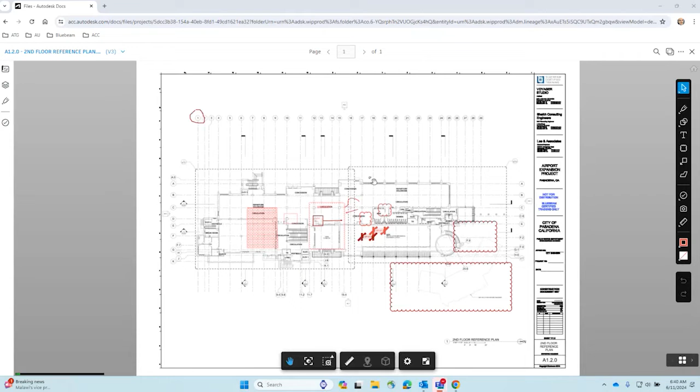Now, these are the ACC markups, and just so we're all aware, ACC markups are rasterized markups. So truly, it's a layer on top of the PDF, rasterizing the PDF itself. It is not an actual markup that is being vectored based on the PDF. So when you bring this out or look at this through Revu, you don't see the ACC markups, but you do see the markups if you mark up through Bluebeam into Docs, because they aren't rasterized.

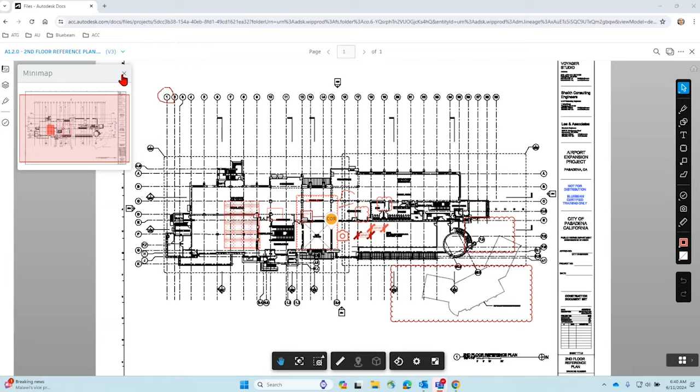I think if you do have questions, you can ask - just a recap if I didn't clarify that. Just to recap, if you haven't seen the difference between raster and vector, it's a big difference. Raster is going to be anything old and scanned, so when you zoom in, it's all pixelated and gross.

Vector is driven from something generated by a computer, right? So it came out of CAD or Excel, things like that, where you zoom in and get that crisp line. That makes a difference. So when you bring a PDF that was vector-based

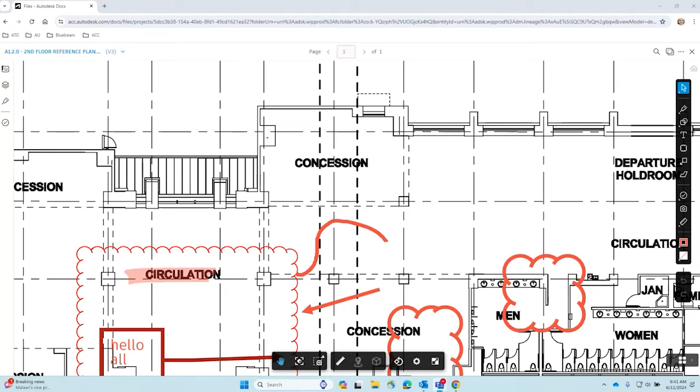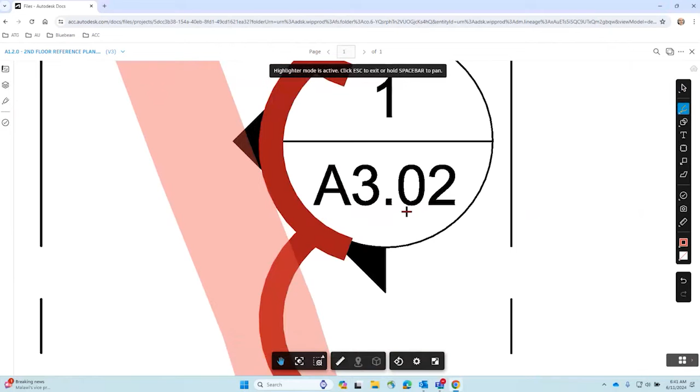and bring it into ACC and start marking it up, it then rasterizes it, which makes it a little gross. So with that, what can we mark up in here? You can select, you can multi-select. I'm assuming this just lets you select your markups. You have the ability to use a highlighter. Oh, I forget that the zoom's different. So you can't really select the text.

I would assume that's because it's rasterizing it to be in the cloud. You can use a pen. Let's scroll out. What do we have for markups? You have a cross that you can change. You have the ability to use the circle. I'm not going to go through all these, but there you go.

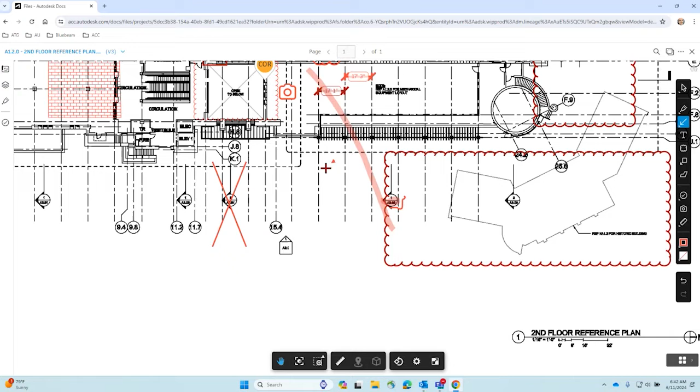Can you edit this circle though? Yeah, let's see. But you can't change your arrow. Okay, no, so there's that. You have text.

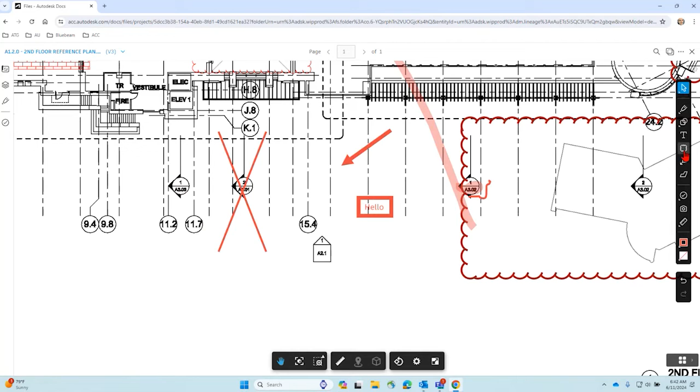Now, the one benefit to this would be if you're already in a solution and sticking true to a single solution because it's a single source of truth, right? That would be one plus, meaning the design team's already in Autodesk Construction Cloud and they're publishing into docs, sets, and vice versa into build.

So if I go into cloud here, can I go through and mark up on it with a Rev Cloud? You can. You have a call out. Perfect. Same thing, just not a lot of modification to information here.

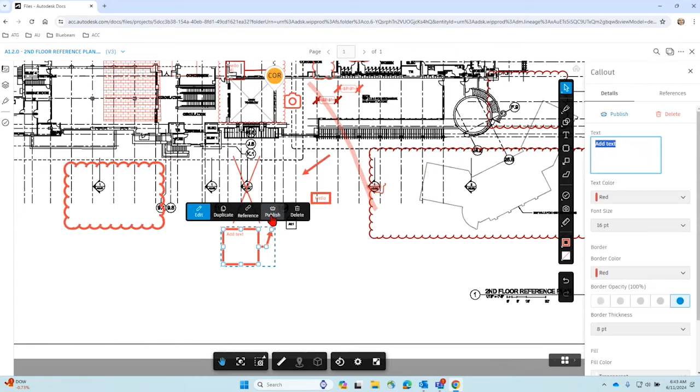You can also wait, just so we're all aware, within docs there is a publish feature. So if you wanted to wait to send it out for everyone to have access to it, you can wait to publish them or unpublish them so people can't see them. The difference is that if you're marking up and you don't publish it, that's only available for you to view. So only when you open it do you see those things. When you publish it, if anybody else opens it, then they see them.

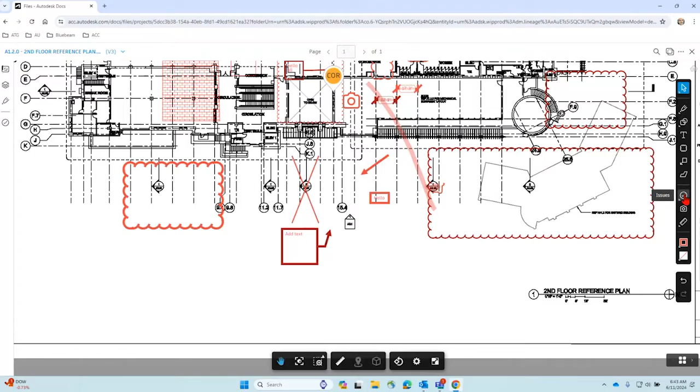I really think, I don't know, because it's been a while since I've been in the field, I probably wouldn't use markups. I'd probably use issue tracking and live model issue tracking, right, versus marking up in this way. That's probably the route I would go in industry versus marking up here.

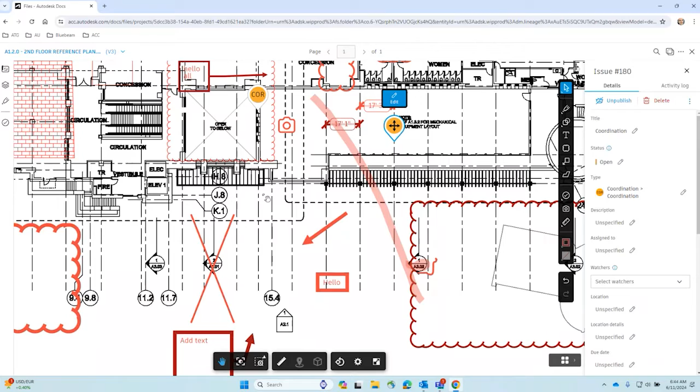But that's just my opinion. So there are issues from a PDF perspective, but I would prefer to do issue tracking from not a 2D standpoint. If we're using Autodesk Construction Cloud, I would rather leverage a 3D model than a 2D PDF, right? Because it's right there at our fingertips for coordination purposes, marking up something that's not modeled correctly. Or for this instance, if I said this door is out here in the middle of nowhere, I would have seen this in the model versus the PDF, right?

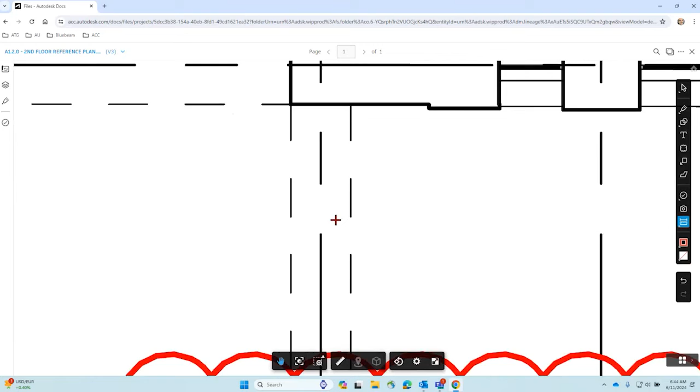And then done issues. But yeah, we're doing this just for the sake of showing, right? So you can add a reference photo, you can measure, but you can't snap. So it's a pretty rough eyeball estimate. Again, I would believe that's probably because it's rasterizing it via the web browser.

You do have area, cool. So you have area, freeform, polygon, freeform line, polyline, and calibrate document.

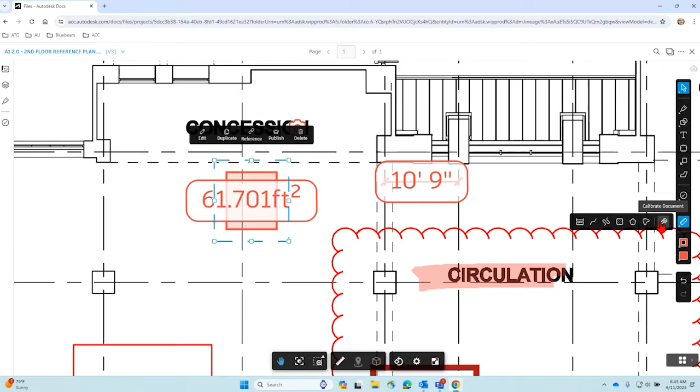Did you already calibrate this document? How does it know what scale? No, that's what I was wondering. Let's just go to a typical doorway. Let's see, there is a scale bar on this drawing. Oh, good call. I forgot this is the out of the box one.

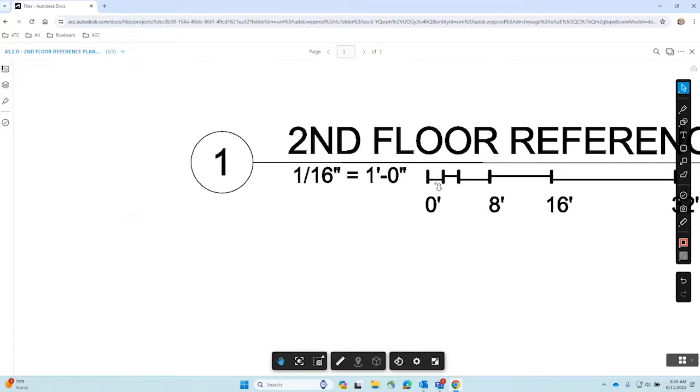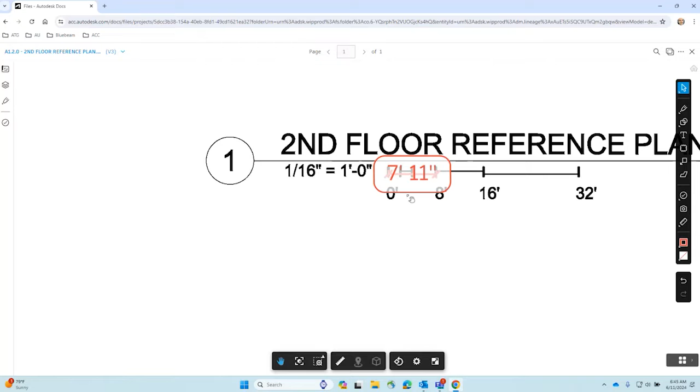Yeah, but you still can't snap to it, right? So your calibration is going to be off. I don't know about you, but an inch is an inch. That's not tight enough for my liking. I wonder if you'd have to go to, since I can't see the line weights end to end... oh, I guess end to middle.

Yeah, but then how do you know the difference, like wherever else you're measuring? I don't know, so right.

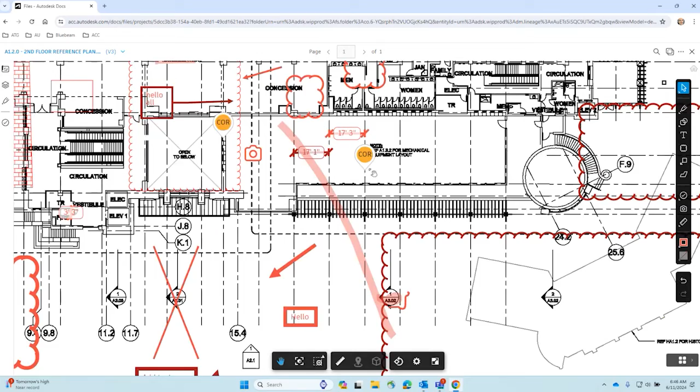Very rough. I mean, obviously Autodesk does have a better takeoff program, aptly named Takeoff, but that's meant for more 3D workflows and model-based workflows like Michael was talking about.

But there are some pros for this 2D workflow. One of them is, I was getting excited and then had to temper myself, because in AutoCAD - not Civil 3D, not AutoCAD Architecture, plain old vanilla AutoCAD - eventually these markups you make in ACC are going to be able to come over to AutoCAD and be visible.

So that's where, hey, I'm away from my office but I need to go see those new plans Bobby put up for me to review. I can make markups on my phone, iPad, Surface, or whatever web browser, go in, and then Bobby can open up AutoCAD and say, hey look, I've got changes I need to make. It'll allow that coordination, which will be pretty slick once it gets sorted out.

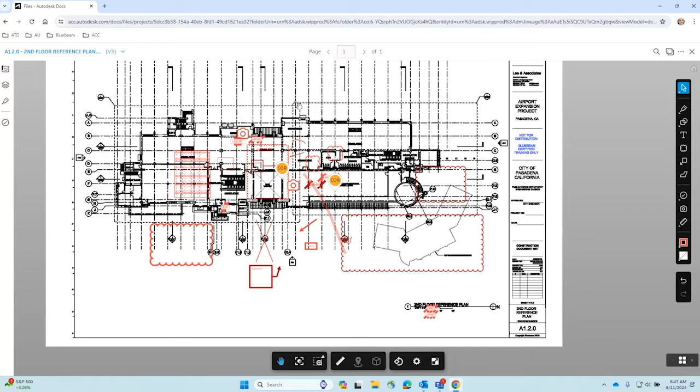But nobody's using plain AutoCAD as much anymore.

And I was going to say, if you come back to it, I can just come into here instead of going through the model itself of a 2D plan.

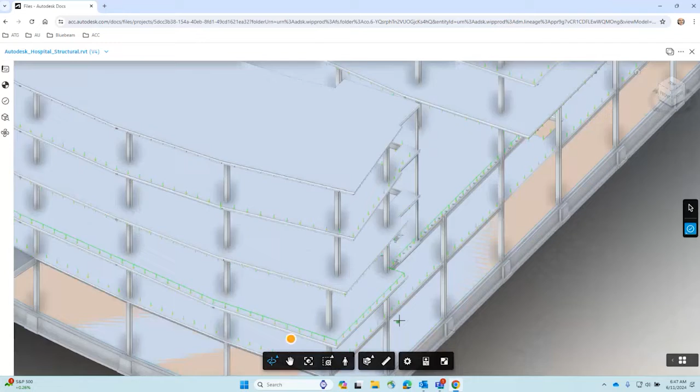This is something we're not comparing because it's completely different, but issue tracking directly in here - hey, there's a coordination or model issue within this specific area, and you're assigning it to a person. You can already do this from a Revit standpoint, issue tracking directly inside Revit to address those issues.

So it comes down to, well, we're comparing 2D, and that's what Jason was saying - at some point I think that'll be cool for those folks modeling in AutoCAD who are still in that era. Drafting in AutoCAD, there's no modeling in AutoCAD.

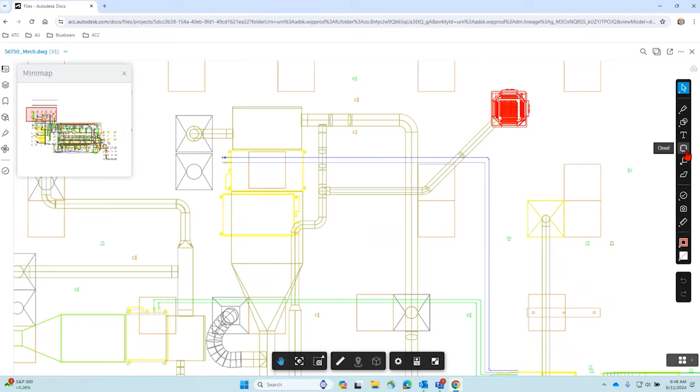You can do something like this. That doesn't even scale right. Can I scale this down? No, that's terrible.

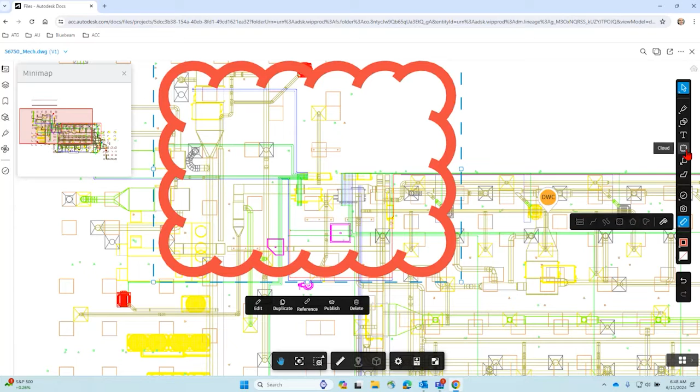What do you do in this instance? I guess you rescale the PDF. Does that change the size of this? No, I can't even rescale it because it's a DWG. So they just have a big rev cloud for an area. That's kind of gross, that's what I'm saying.

It's weird. There was a comment from David - if you can't mark up accurately, so our scales are off, calibration's off a little bit, how would it bring into AutoCAD accurately?

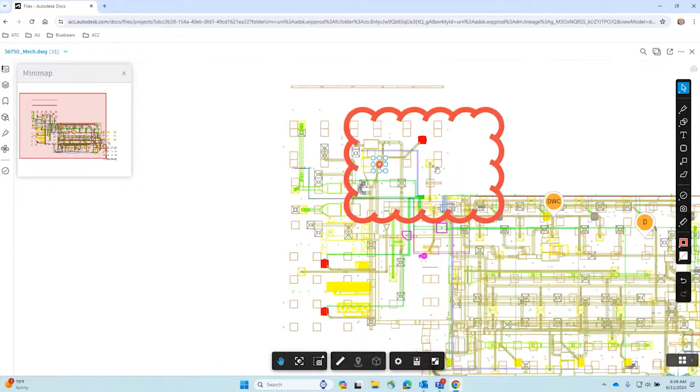And it wouldn't, but that's not what you're going to be using this for. You're going to be using it for callouts - hey, move this door, hey, this is spelled wrong, we're missing a table, that type of thing. It's not going to be an actual design thing where you draw in a new wall or structure or location of something and have that come over geographically. It's just going to be more of a typical markup workflow.

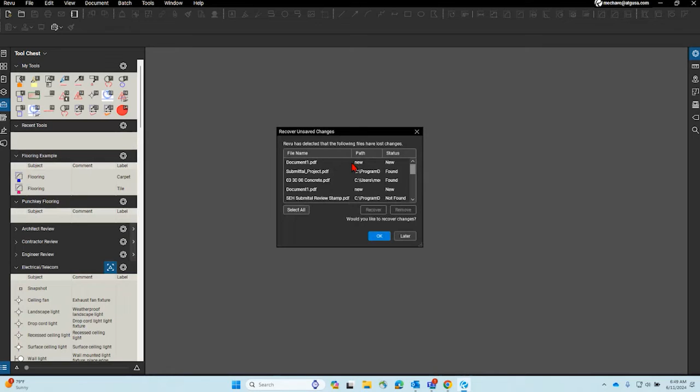But let's open Revu. So outside of those markups - okay, your team doesn't want to use ACC markups because of the limitations of what's available - what options do you have? We're not going to pick, we're just going to inform and allow you to make the informed decision.

There is a workflow - you can go to File Open. The only downside to this is that one person can have it open at a time. The one plus side of ACC is you can mark up simultaneously on a PDF, which is a rasterized image. So really you're not marking up a PDF simultaneously like in Revu, it's an image simultaneously in ACC. So the downside, if you open it up in Revu, is another person can't have that same PDF open.

So if I were to go here, I can go to Docs. Everyone has access to the desktop connector, whether you've installed it or not is up to you. From here you can go into your projects, and from this point you can access - I forgot where I have PDF right here - okay, you can access any PDFs you have in Autodesk Construction Cloud.

Now for those folks that haven't used the desktop connector, the new one, just so you're aware, you do have access to decide what projects you want to have access to through your files here.

Just be aware that you are selective on what docs from the Desktop Connector show up in your file explorer. Reason being, some of us have hundreds of projects and don't want to see all of them. I think you're only able to select around 40 of them.

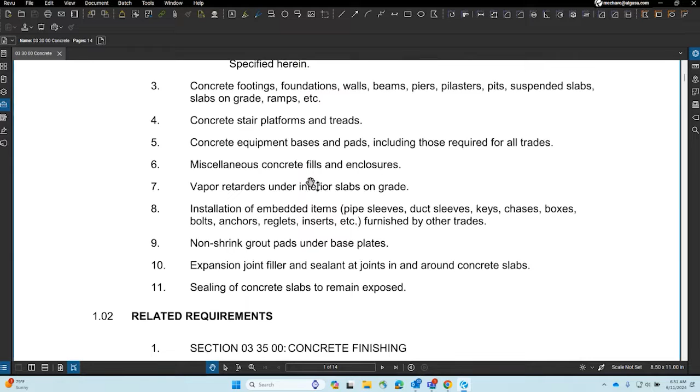So what you can do is I can open this up, and I can mark up PDFs. What I'm able to come in here to do is mark up. Let me actually just go through this from the ACC project.

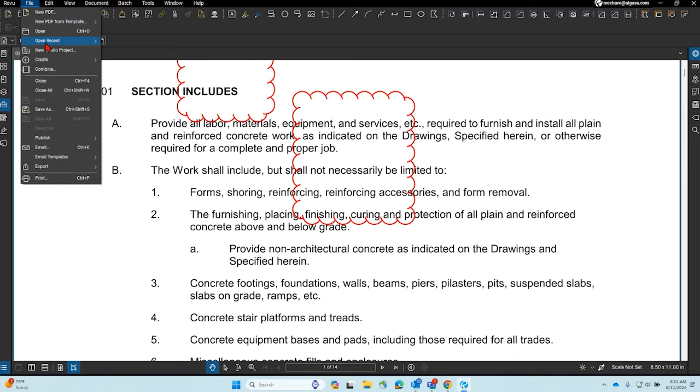I don't believe I have that one open. Let's go back and see. Did I have the Kyle Lee's one? I did, okay, Sandbox, yeah. So in typical Michael fashion...

He hasn't updated. So according to Caitlin and some of the other folks in the chat, with the new update to Desktop Connector, you can get 80 projects instead of 40, which again is just too much. It's too much, but hey, you can do it. And there's issues with working in it.

I think the issues with Desktop Connector are version specific. So if my update was from 15 to 16, I'd have an issue, right? Yeah, there's 80 projects right here. But my update version is like the points, I think, 16.8. Oh, I'm probably way behind myself, but that's okay.

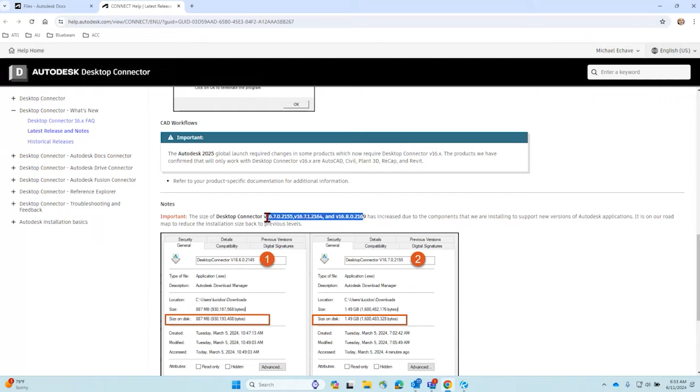Yeah, I know, because there was an issue with going from the 15 to 16 transition and working in a project in ACC. So you have to be diligent on updating, especially when it's a brand new version. I just haven't been working on projects. Typically when I go work on a project in ACC, I make sure I update to the latest version.

And keep that in mind for the IT folks on the call. Desktop Connector does require a bit more updating, and if you don't allow your users to have local admin, that's something you're going to want to make sure is taken care of, and everybody's on the same version.

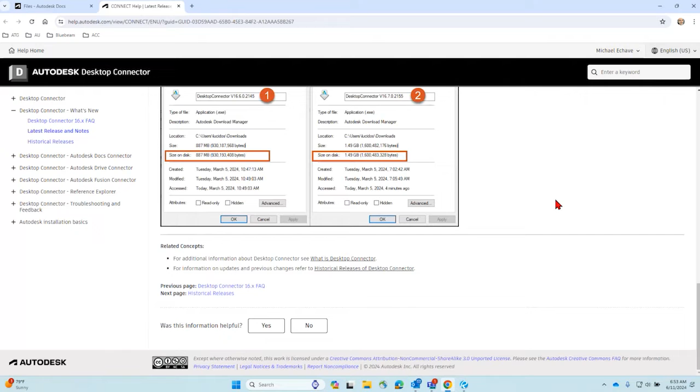Yeah, look, they did a 0.0010 update, but being aware is hyper diligent for working in ACC, especially when updating. This needs to be up to date. And that depends on linking methods.

You should be using an external reference. You shouldn't be using link through Desktop Connector. So I guess that's just more about being aware of how you're leveraging ACC. Whenever you link a file, go to external references. You do not go to docs. Just so we're all aware with the ACC platform part.

Now, you do have to use the Desktop Connector when bridge is happening, but I'm not going to get into training right now, I'll continue onward. Going back into here, because I can feel Jason just staring at me, laser beams.

So going back into here, you have the same PDF that's in ACC that we were just looking at, and we saw a bunch of markups that were on there. So I'm going to hit open. And these are the markups from Bluebeam.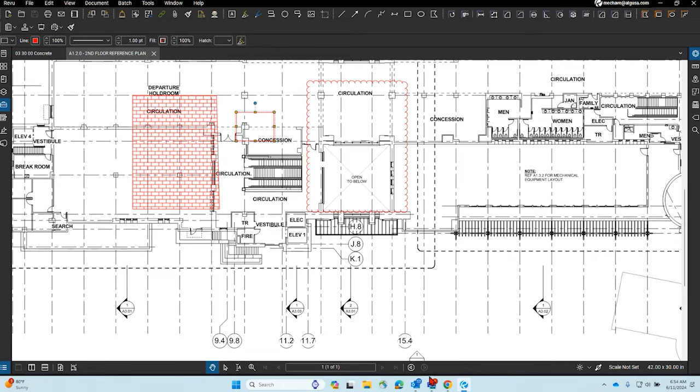But if I go back to that same PDF, I don't see the markups from ACC, right? I do see the markups from Bluebeam, but not the markups that ACC made. So be aware of that.

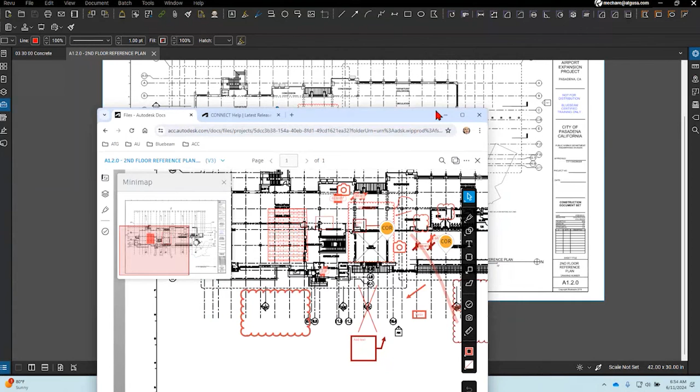And now I can see that I can be in it. I can still mark up, but I still have this open. If I go to docs, I will say that it does lock it. So let me open up a new window explorer here, trying to do 10 things at once.

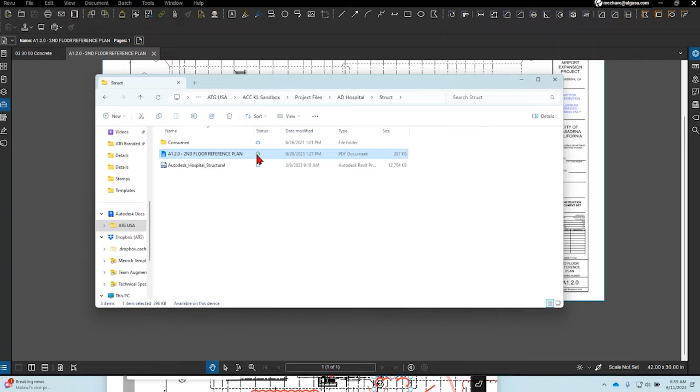But basically, if I go into here, I go back into Kyle's project, I go back into here, I see that this one is open right now by me. Well, it doesn't say by me, but it shows a green checkbox. I can come into here and do this, and it will show a lock.

I did this the other day. Basically, when I come into here and I hit save, let's see if I right click on this, it's going to definitely...

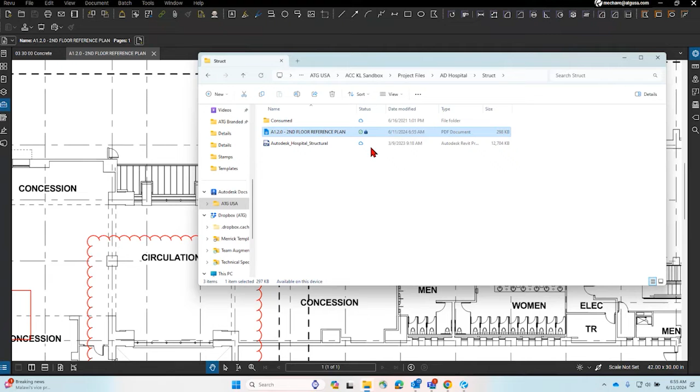So if I hit save, I go back into here. It's locking it because it's syncing a pending request, a lock from ACC in terms of file locking so it can publish a new version. Great, so it unlocked it.

I probably could have seen, like, in the same time of me saving it, is it doing something? Well, yeah, see, it just turns blue. I would assume that means there's a new version being published here into the ACC platform.

And that's one cool thing this offers - version history. You can always go back and say version one, version two, compare them, or re-enable version one to make it current. It also becomes really handy for tracking progress, either in the base files and arrangement, and also the progress of the markups as they're being taken care of.

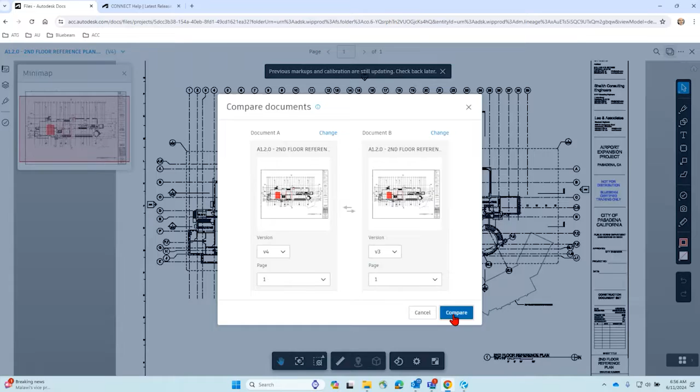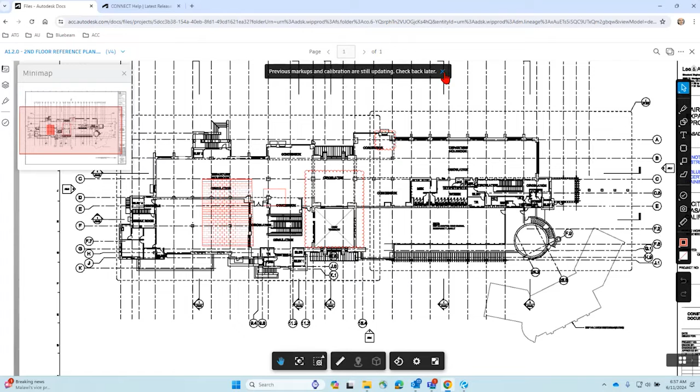So I'll note that the Revu markups are still here, but the new version erased the ACC markups. Oh yeah, it now says previous ACC markups and calibration are still updating, check back later. That scared me. So how long does that take? I don't know.

Because it's essentially like a layer on top of the PDF, an image of the ACC markups - that's why you don't see them in Bluebeam.

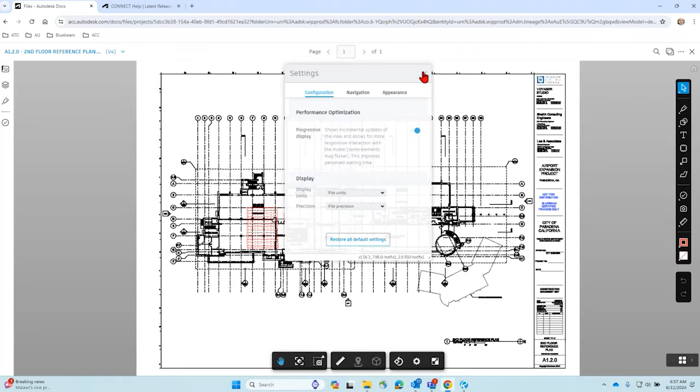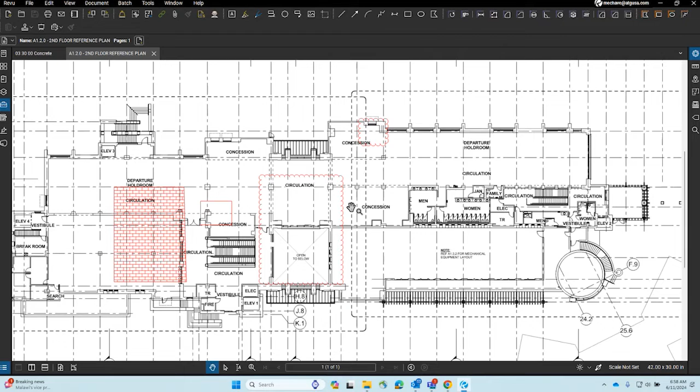Okay, so we'll wait. Check back later - that must be frustrating if you're working on a project. Yeah, that's why if you were doing this, I would probably say everyone on your team should be using Revu markups in ACC. ACC is just your bucket of storage of republished PDFs, and you're marking up in Revu. Having that single source, it'd be like working on a PDF in SharePoint - it's living in SharePoint, but you're marking it up in Revu. ACC Docs is just your storage platform.

And if you wanted to view it but not mark up, ACC would let you view it on the go. But that being said, there's now Bluebeam Cloud. In a true fashion, not everything would be siloed information with different technologies being able to do different things. But of course, in the day and age we live in, there's competitiveness, which is great because innovation happens and you get new technologies being released. So whichever one fits your groove and what you're able to utilize - maybe from a PDF fashion, you're going to be leveraging Revu.

What's the next step too from a CA perspective? Are you invested into something like Build, or PlanGrid, which is integrated into Build now? Or do you want to use your Revu PDF solution and get enough out of Cloud? You see where they're going from a company standpoint - Nemetschek, who owns Bluebeam, especially with acquiring other solution providers to integrate into this CA tool, hopefully. I would assume they'd integrate, because you don't want a third app that you're going to have to launch something from here into there.

But what really strikes me is the ability to do sessions - someone from a PM perspective initiates a PDF, so your set lives in Docs, initiates a session. The session then initiates into here, but also Bluebeam Cloud. And hopefully soon your phone would be a game changer.

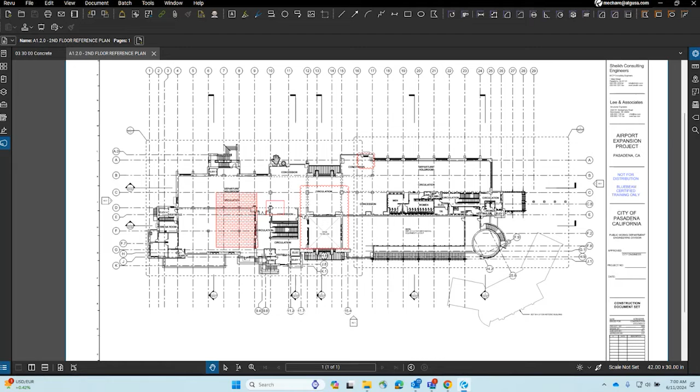Brian Haley's asking, in this case, is our single source of truth ACC, Bluebeam Cloud, or Studio Projects? And that's sort of a trick question, because Studio Projects and Bluebeam Cloud are on the same cloud, but you're pulling things from Projects into Bluebeam Cloud. Yeah, see, this is where things get muddy - or cloudy.

Which is confusing, because why didn't Bluebeam integrate Projects into Cloud? I think it comes down to where they put the storage for creation of that solution. We all remember Studio sessions being down during that migration into Bluebeam Cloud. Everyone was freaking out about it, and rightfully so, because people were working on projects and it wasn't really announced. There was a hiccup when they got this into cloud. They didn't say that was the reason, but Spidey senses, tinfoil hat - this came out, and we were maybe aware that when it went down, there was probably an integration happening. But who knows, that wasn't a statement, just an assumption.

With this being released, this is currently the only solution linked to your desktop application. However, you can go to Projects, and when you create a project you can upload PDFs from it, but that's it - it's just copying them into the Bluebeam Cloud environment. If I go to add drawings, there's an import drawing file from Studio option. Studio is just your Studio projects, and it's pulling the PDFs and copying them into Bluebeam Cloud. That's it. You can push back at the end, almost like a PDF package from Studio into your project. If I wanted to export these files, there's a way to export PDFs once you're done, and everything moves around.

Pretty slick. So you showed the markup, the PDF markup capabilities of Autodesk Construction Cloud, right? And there was that conversation about not being able to calibrate. Yes, there is a calibration tool, but you don't have snapping capabilities, so your calibration is kind of off. Depending on how tight you need your measurements, that could make or break it for you. 100%, I would not trust it for the type of work I've done in the field, but is it close enough to make sure this isn't metric scaled up? Sure. But otherwise you're going to have about an inch of tolerance, which in a lot of construction trades is not enough. And if that is enough, please don't work on my house.

That said, there are things of great value, and there's other things we're not even talking about today, like the power of Autodesk Construction Cloud when it comes to working on drawings and Revit models and working collaboratively on the design side, more than just the PDF markup coordination side. We're leaving that out because that's a no contest. Can't do that, that's comparing apples and oranges. We're comparing apples to apples.

So just looking at the PDF coordination, right? Most jurisdictions or clients still require a plan set, and that plan set no longer has to be paper, which is exciting, but it has to be PDF. So apples to apples, dealing with a set of PDF plans in Bluebeam Cloud or Autodesk Construction Cloud is sort of what we're still weighing. You've seen some of the power, right? So trying to keep Revu out of it, Revu being the desktop product, let's go into Bluebeam Cloud and look at the markup options, because they're not the same.

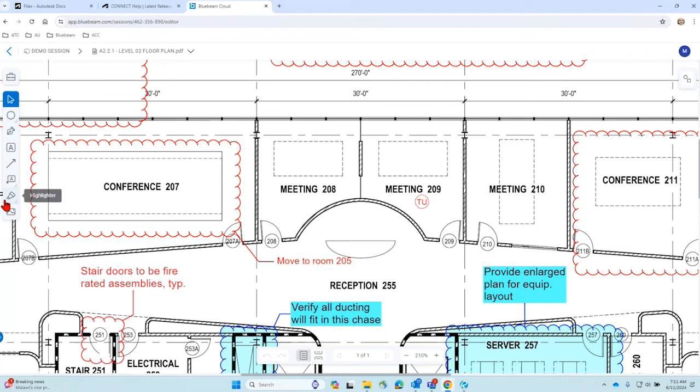While you're queuing this up, Michael, it's important to note that yes, Bluebeam just had a price increase on the first of the month. And yes, there's already been a handful of updates for Bluebeam Cloud this year, with another one coming this month.

So the rate of adoption and new functions and features is coming. Now, as you mentioned a couple months ago, that kind of backfired and caused an outage for 2 or 3 days. We're hopeful this week... actually it was a whole week. Oh boy, and it happened twice. People were messaging, so yeah, good times. Worth it, maybe not for some folks, but in my eyes, if you look at the grand scheme of things, the pain...

And then people did reach out and ask, well, what else could we use? I mean, Sessions is the predominant live collaboration workflow. It's a differentiator between other solutions. There's really nothing like it.

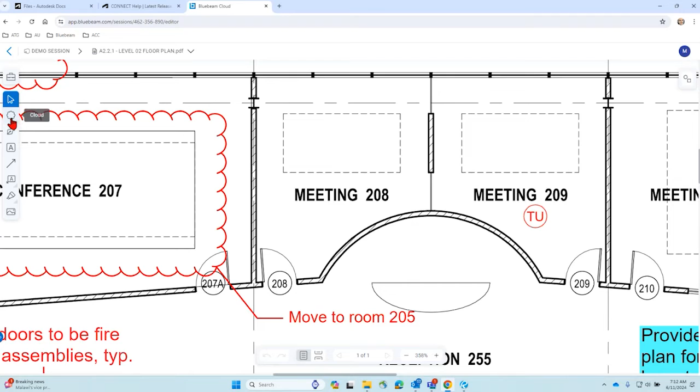So coming back into here, you have markups in the cloud, so you can get access to your tool chest. Now, people have asked me this before - it is the first initiation of your publish, of when you open up Revu 21 into the cloud. There is no republish of your tool sets into the cloud, which is frustrating, I know, but you can upload a new tool set from your desktop. So if you created a tool set, you can upload those, or you can create one here - we've all went through that before when we were in here. But either way, you do have the option to come into here and grab some of these tool sets, which there are a ton of old ones, which is ridiculous. I probably would want to come in here and clean these up.

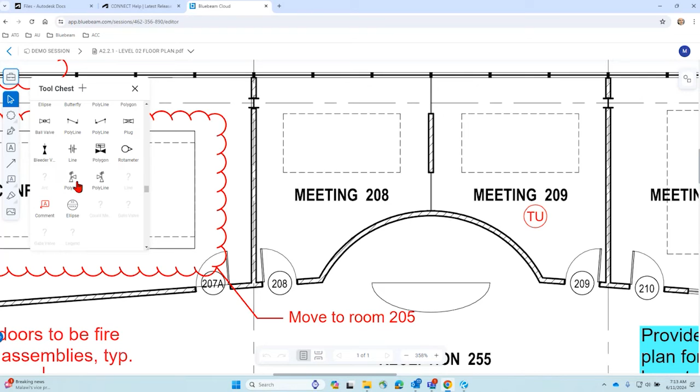So if I wanted to go into here, I can still place these markups directly on my PDF. There is a scale option, so that's awesome - you can scale these up or down. There is no calibrate, no measurements like we talked about before, but hopefully Bluebeam does something where you're able to snap to content. Right now, as we can see, it's not allowing me to snap to this specific content when I'm placing this arrow. Does this resnap? Nope, so it's not allowing me to snap to content here.

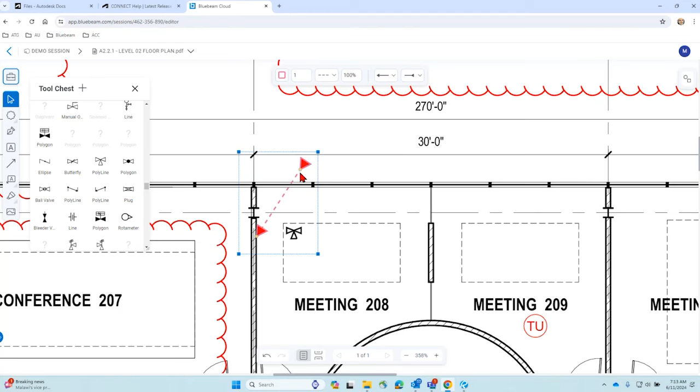But you do have the ability to change - you still have these same kind of abilities, not the line style, but I can change my arrowheads. That's cool, you weren't able to do that in ACC as well.

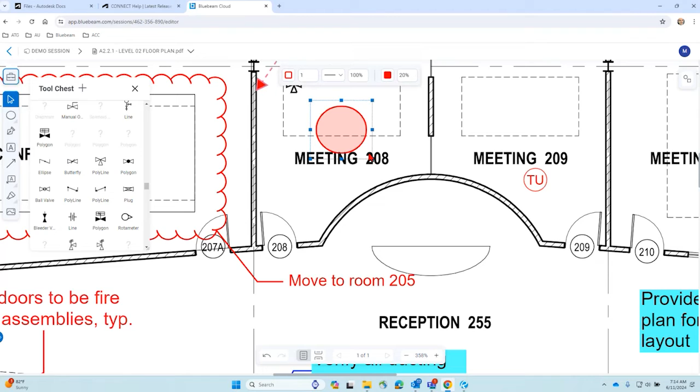So you have your tool chests, which is your tool sets, and then you had your cloud. If you hold down - so is it just a click? No, it is a hold down. Cool, so if you hold down the markups, you have cloud, rectangle, or ellipse. So you do have the option to place ellipses here. From here, you do have some options here. I will note, I was talking with someone about this because we were looking at things like...

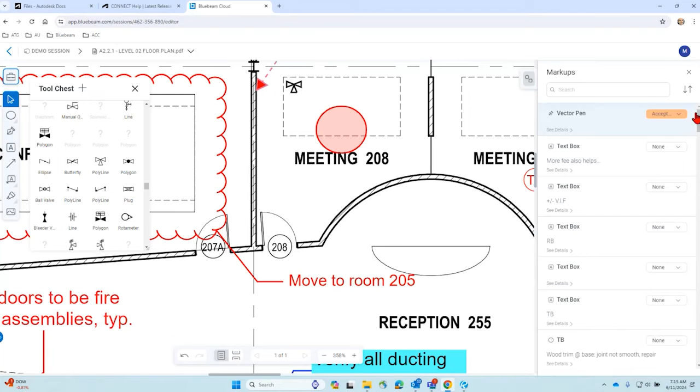The thing is with this is that yes, you do get your statuses, but there's no markups list in here, right? So if you change this to rejected or review, that's it. Oh no, you do, perfect - you just click the... this is just weird here, the UI for it. So you would click the open button and it shows you this status history. That's cool, but it's just not as apparent as a review status list down here.

We've been spoiled for a long time, yeah.

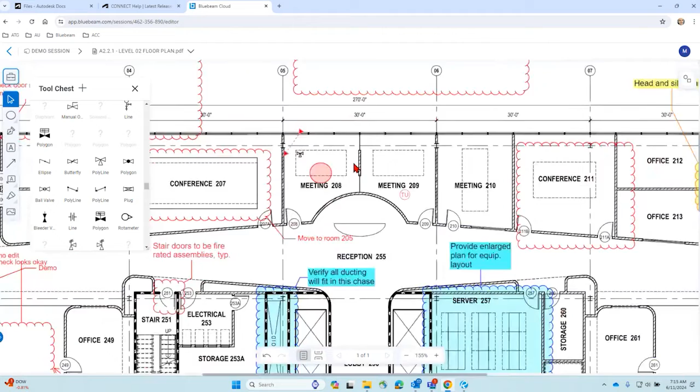Okay, so coming back into here, let's scroll back out. Since I am in a session, things are locked, just so people are aware when I was hovering over information. This is because I'm just marking up in a session - this is the same markups that you get in a project as well.

There is the vector pen, which I believe - I have no idea what a vector pen is, but typically when I think of a vector pen, it's like 3D. The vector pen would be, I'm assuming... I don't know why I thought it would be 3D. I haven't looked at the comments yet, but I would assume vector pen is that it's a vector-based markup. Wouldn't that make sense? Right, that makes perfect sense. Okay, so that's vector pen. There's text.

So you do have the option to come in here to change color, text type. It only gives you two options. I wonder if that's only what's supported in the cloud. Colors, opacity, cool.

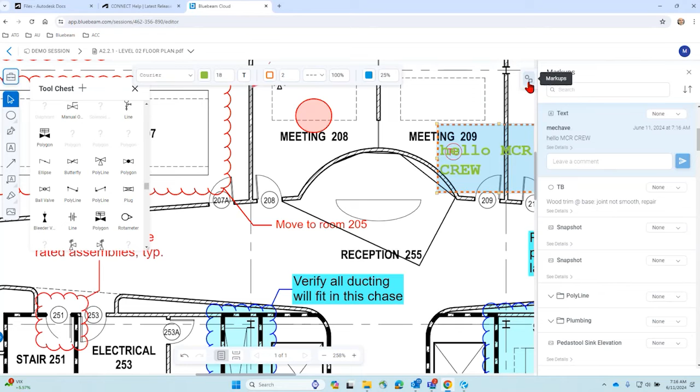Perfect, so same thing here. You have the option to leave a comment. This is like the markups list for the cloud, so you can leave a comment if you wanted to. Same thing, change status. Okay.

So arrows we talked about. Hold down for call out. You get your famous Cloud Plus, which is always a lovely tool. So you get your comment with it.

Oh, I guess you need to actually... why'd your cloud show up funky? Yeah, I was clicking, so you can do your click like you typically would by place. Apparently it needs an actual comment for it to be placed.

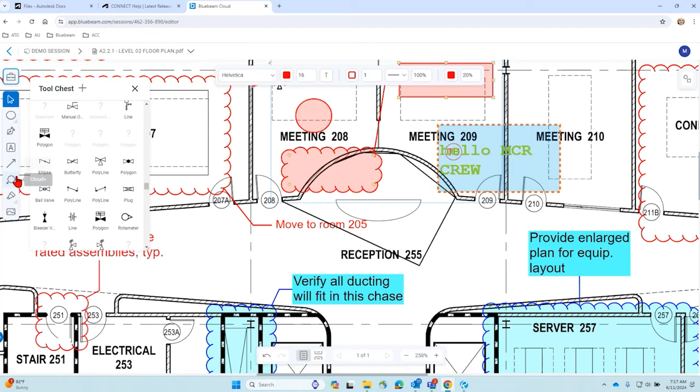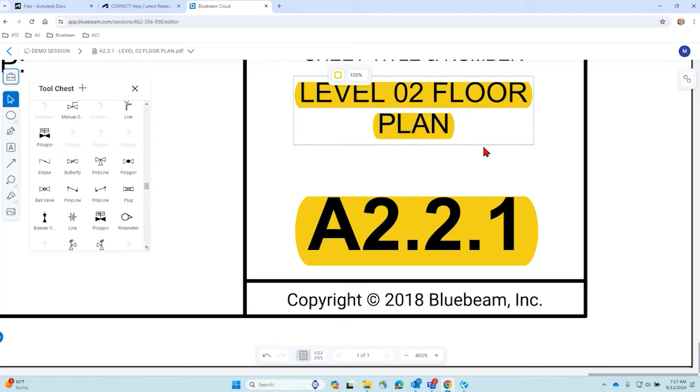Okay, highlighter. Let's see, is this the same highlighter as... ooh, I can select text. That's cool, so it is true vector data.

That's cool, so there's a question. If you save a Bluebeam Studio project PDF, does it automatically update the Bluebeam Cloud version? What was the question? So if you still save, multitasking. Yeah, right, if you save a Bluebeam Studio project PDF, does it automatically update in Bluebeam Cloud?

So earlier you talked about you opened up a project, or in Bluebeam Cloud you pulled in a PDF from a project, and you said that makes a copy of it. Is that a true copy? Meaning that if you update it in Revu, does it go back to cloud, or is it a completely separate copy at that point?

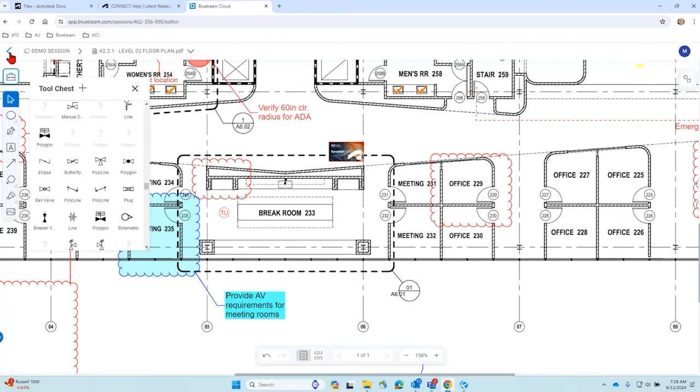Yeah, so the only integration into the cloud is sessions. Otherwise, it's a copy into the cloud platform. So think of it as studio projects and sessions. Well, no, because you can integrate it in projects, so take that back. Okay, so if you initiate a session in the desktop application, you see it here. This is the only integration in cloud right now that is dynamically linked data, which is sessions.

So yes, my markups from sessions of this demo that I just marked up, Jason can open Revu, the desktop application, and see those markups live. He can download a PDF set, and they're up to date. Projects.

If I pull from projects, which is not sessions, so for those folks newer to Revu, there's projects and sessions in the desktop application. Let me open the desktop application so I don't confuse you. Projects, sessions. Projects is storage through the desktop application.

I can pull PDFs from projects into Bluebeam Cloud projects. As we showed earlier, it is copying that PDF and pushing it into a project in the new cloud platform, which is a different AWS server point.

Yes, you can publish those finished items, not just PDFs, because it's everything in the project. From a CA standpoint, it's going to publish the drawings, the documents, the punch lists, the RFIs. I forget the file extension, it may be a zip file, maybe a PDF package, back into a project if you wanted to, but it's not updating the project information. It's a new copy of what it updated from here.

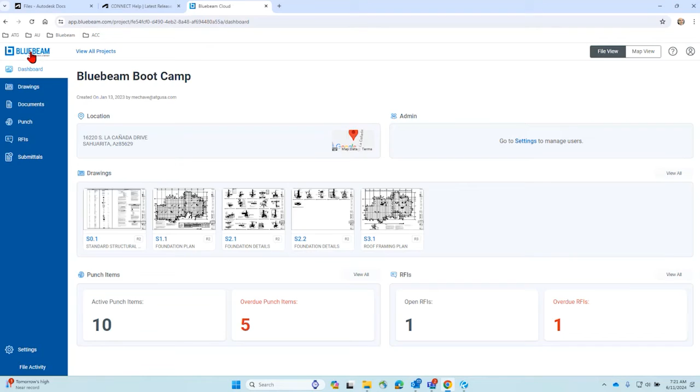I don't know if everyone believes there's a good reason for it, because I think they want to use it as like a storage hub, and that's not what it's meant to be. So I'll let you get back to it, sorry, I just wanted to add that.

Right, but that's exactly it. Like if I'm in a different time zone than Michael, we're 2 hours apart right now. If I work and I'm reviewing something and I say, hey, I'm done, I spent 2 hours reviewing it, and then you come in and change the file name or drop in a sheet, that means I've got to go back through it. Doesn't work.

As Jason survives his cough.

Yep, that's right. So Sessions isn't meant to be updating PDF sets. Sessions is meant to be live collaboration on the current PDF set. Now, if you want to upload another document that is updated, by all means you can.

Just be aware if you download a PDF from Sessions, it removes ownership of the markups. And when you publish it back, no one can change those markups because they were initiated in a different session, or vice versa. If you made markups on a PDF and pushed it into Sessions, no one can change those markups because those were made prior to the session, or vice versa. The markups were made in another session and you can't update it in a session.

That's probably like some Inception, confusing things, but you can always ask us and we'll show you. So, right, there's a question.

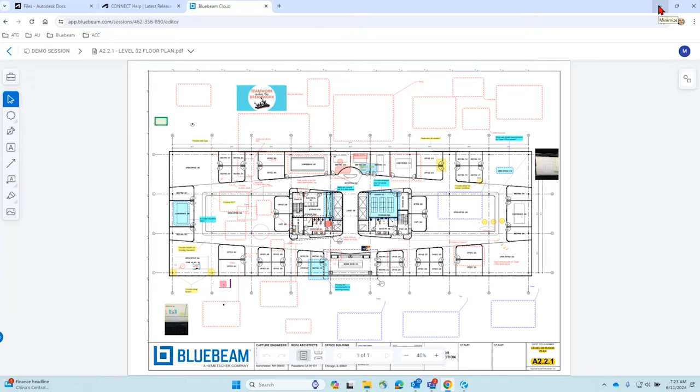If you updated your sheets in Sessions, do you have to start a whole new session? You can stay in the same session. You're just going to remove that outdated set of plans and upload the updated set. So anybody who had access before is now going to have a brand new set of plans. From there, you could just get in there, upload a new file, put a note saying 'hey, this is updated and this is why,' and then notify attendees. They're going to get an email saying, hey, you need to go look at the new updated set. So this is not meant to be download this, delete it, new set, with original markups.

It's meant to be, hey, here's a good scenario. Jason and I are working on a project. I'm going to be sending a submittal to Jason to review. He needs to review it, give me red lines to mark up so I can edit the set, right? Basically, I would upload a new set into here. Jason would see the new set, maybe a new different date and time. I would alert him that this has been updated. And then he would come in at whatever time he starts his day and make markups. And I'd come in, address those markups, republish a new PDF into here for him to review.

That's one workflow, just one of many. But you're not deleting this PDF here and downloading it, save as, and then re-uploading it like you added a page to this complete set. That's not what it's meant to be. Because it's meant to be a markup of the current state of the current document set.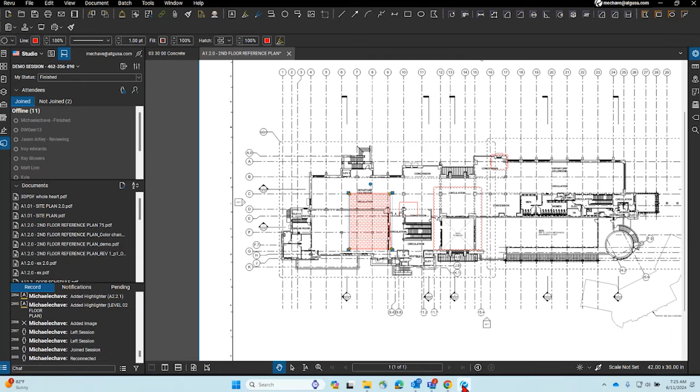Correct. And that said, next week we're going to dive more into studio projects and the best practices. We will revisit studio sessions because they're sort of related when we're talking about it next week. So it will be a little bit more interesting when it comes to best practices and helping you and your firm figure out what the best workflow is. Obviously, if you're not already in the Revu ecosystem, it's going to be a hard battle. But if you're already there, use what you have.

And the only other comparison from ACC, so if we reflect back, you have all of these.

They do have issue tracking, with punch lists and RFIs directly in cloud. RFIs from a perspective of using ACC, it's in Build. We're talking about the whole cloud platform. I guess we could talk about Build. We didn't talk about that.

Let's wrap up today with our 4 minutes left and talk about the can of worms we opened up saying Autodesk Construction Cloud. So Autodesk Construction Cloud is the platform, and in the platform there are different modules. I hope this is the vein you're talking about me explaining. Is that correct? Okay, yep.

So Autodesk Construction Cloud is a platform, that's what we labeled this as. There are different modules in that platform: you have Docs, Design Collaboration, Model Coordination, Build, Takeoff, and some other things, which I could just look up so I'm not wrong. Build, BIM Collaborate Pro, Docs,

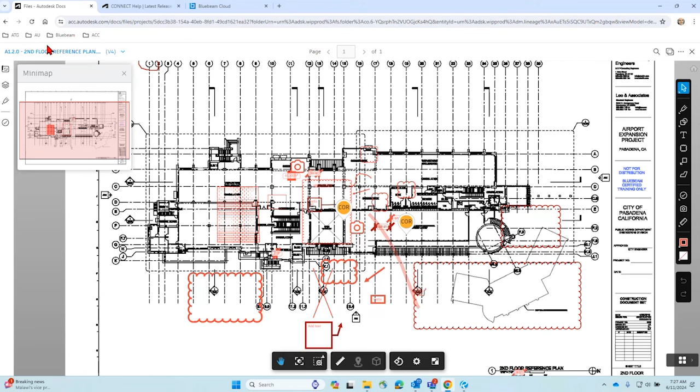So it's kind of like those who remember having cable packages, right? You have basic cable, and then you add on your sports shows, and then you add on your premium movie channels, and then you add on those things too.

Am I back? You're back. Okay, so yeah, sorry. Docs - basically you get different license types to access these different modules. So there's Docs, you get access just to Docs. You get BIM Collaborate, and that means you get access to Docs, Design Collaboration, Model Coordination, but you're not a designer in Revit, so you don't need Pro, which is live collaboration, or you're not a designer in Civil 3D because you can put Civil 3D up here and you're using coordination, right? From Design Collaboration working simultaneously.

So that being said, Construction Cloud is a platform. Modules are here - how do I get access to these modules? Are these different license types? So you have Docs, BIM Collaborate Pro, you'll hear. And then you have a Build license.

And I don't know how Takeoff works because I've never gotten into that, but I would assume - do we still have some folks on here? Kayla jumped in earlier, I would have asked her to say something. Do we have Ted still in here? No, okay.

So I don't know about Takeoff, I would assume it's probably a separate cost. It is, but that's what you get. Okay, so you're going to be able to go through and purchase a license type that gives you access to these different modules. So that's holistically looking at it.

Now, from cloud platform, this is included in your subscription. The basic tier doesn't give you a lot of access - you can view things as a free viewer. I don't think you can mark up. You can't mark up, right? Correct me if I'm wrong, I don't think you can mark up. Or in complete, it gives you the full capabilities to do whatever you want in the cloud platform.

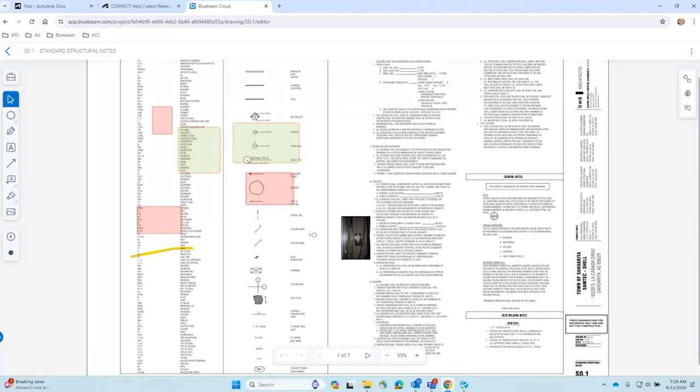So essentially it's included where only Docs is included in the AEC Collection, which is what we were doing, which was marking up. But if you don't have an AEC Collection, which is 3,500, 3,700 last time we looked, you're not able to mark up.

But with that, did I miss anything in the chat as I froze up? No, just on the sheets shown before with markups - that was Docs. So we did most of what Michael showed you today on Autodesk Construction Cloud was Autodesk Docs. So a lot of you have that already if you have the Autodesk AEC Collection. You just might not be leveraging it.